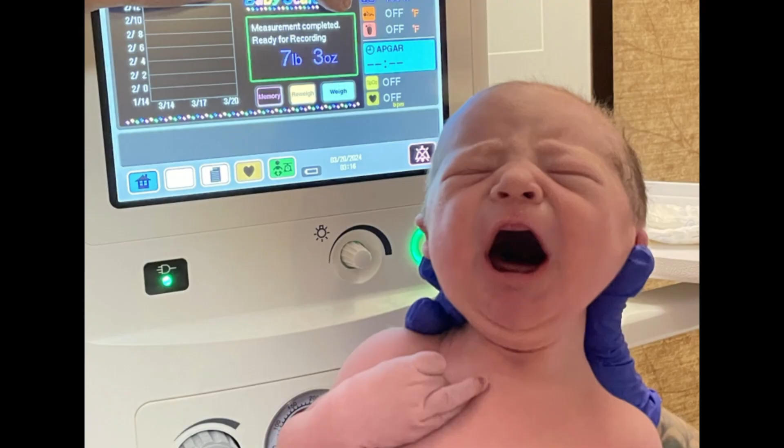In 2024, my wife gave birth to our first son. Shortly before his birth, I was compelled to create a gift for him, a custom homemade gift that could be something he could look back on and know his daddy loves him. That led to the creation of this Stormlight Archive themed Sylphrena nightlight. It was the first 3D print project I did that I played with LED lights, and I've done several since then and have learned quite a bit.

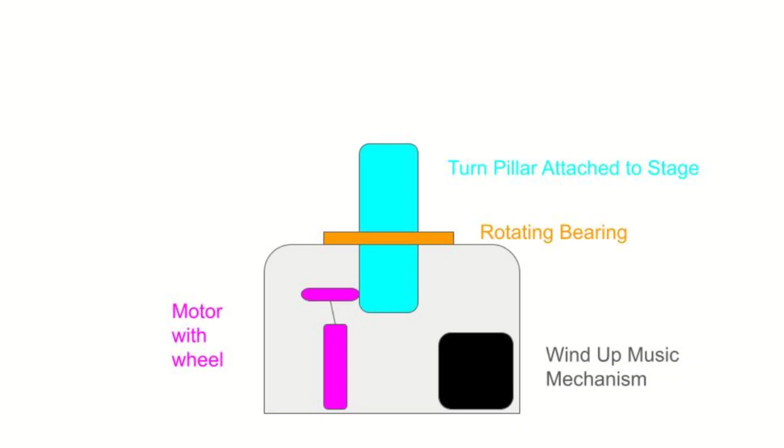Well, last year, my daughter was born, and I wanted to do something similar. So the goal was to make a music box of sorts, though as you'll see, this ended up being nothing like a box. My thought was to have a classic wind-up music box mechanism that, while it plays, will cause a platform or stage to spin, while LED lights will ebb and flow in a dreamlike manner. So let's dive right in.

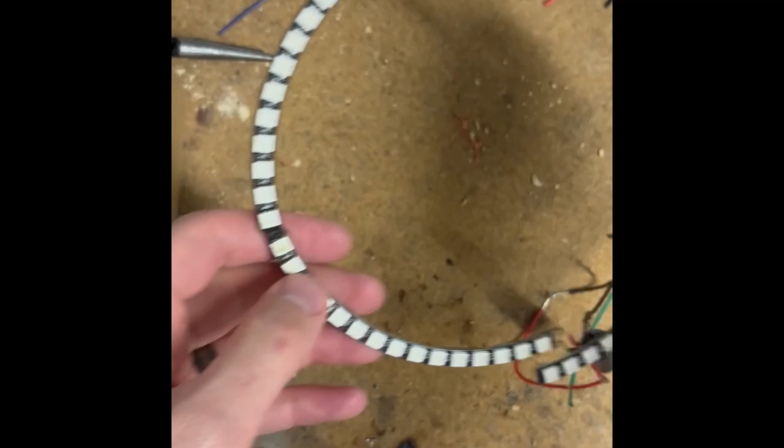Before I went in and started 3D modeling the actual parts, I decided I should figure out the wiring and the electronic components. The easiest way to do this would be to incorporate a simple power button that I could push that would turn on the motor and would turn on the LEDs. However, I really wanted a true wind-up music box mechanism rather than just an audio recording or a speaker that would play when I push the button. I wanted it to feel a little bit more authentic than that.

However, it's also independent of the rest of the system. So I could twist the music box mechanism and music would play, but that would not make the stage spin and it would not trigger the LED lights.

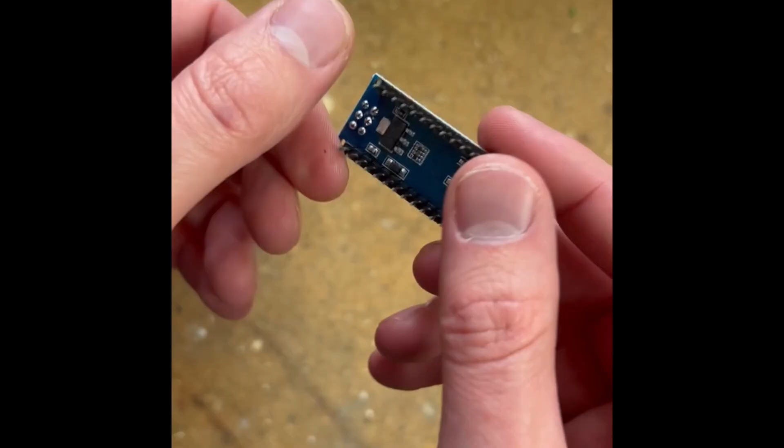And so this is where I got to play around with the idea of what is called a piezo disc. Essentially, a piezo disc detects mechanical vibrations and then can send a signal. So the plan was we glue the piezo disc right next to the music box mechanism so it can detect the vibrations of the music box. That can then send a signal to the Arduino, which can then tell the Nano chip to power both the motor and the LEDs so that everything is in sync. This way, when you wind up and start playing the music, we still get the spinning stage and we get the LEDs ebbing and flowing.

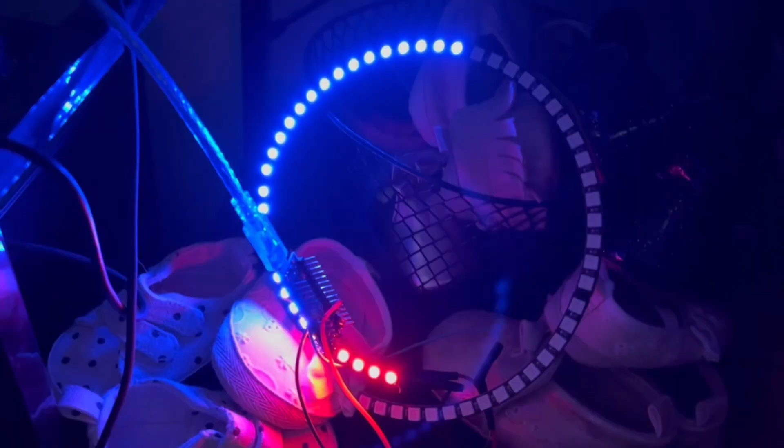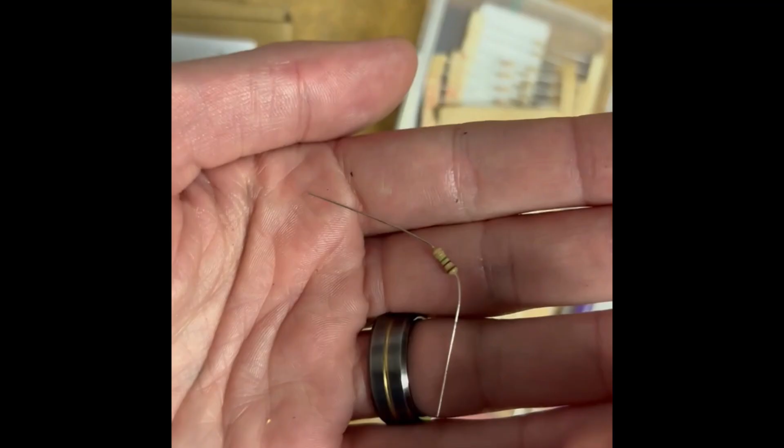Pretty simple, right? Well, there's a few things we had to take into account. One, because the piezo disc can pick up vibrations, it's possible that it could pick up sound outside of the music box. So we had to adjust the sensitivity of it in the code. The other thing that helps with this is putting a 1 million ohm resistor across the two nodes of the Arduino that the piezo disc connects to.

Next, we're talking about powering a motor. Based on the research I did, you don't want to power the motor directly from the Arduino - that's just likely going to cause problems. And so instead, it was recommended I get what they call a MOSFET board. Now, the kind I got already has the resistors and stuff built in, so I didn't have to add any additional resistors to help with the flow of current.

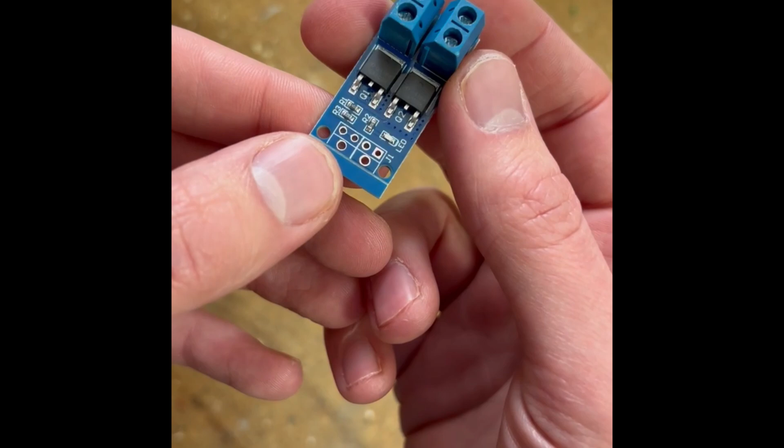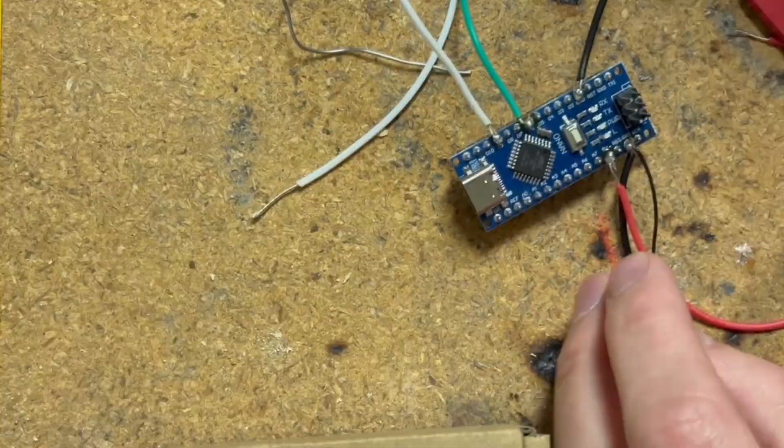But basically, you connect the MOSFET board directly to the Arduino, and then you connect the motor directly to the MOSFET. What's cool about these Arduino Nano boards is that they have a series of pins that you connect your different systems to, and each pin can be independently programmed. So I have one running the lights, one running the motor, and one that the piezo is talking with.

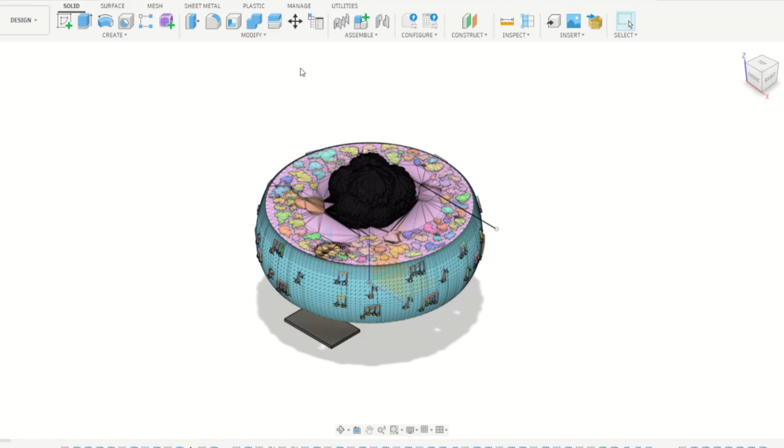All right, then came time for the 3D model. This was an interesting one to model because I had to think very much about the functional purpose of all the different parts. The plan was basically to do this in two pieces - a bottom piece and then a top stage that's going to spin. In order for that to spin, we need a motor that has a wheel attached. As that wheel spins, it's going to push against the top piece and spin the upper stage.

Essentially what I did is I designed the top stage to have a central pillar. This is going to pass through the opening in the bearing that I got.

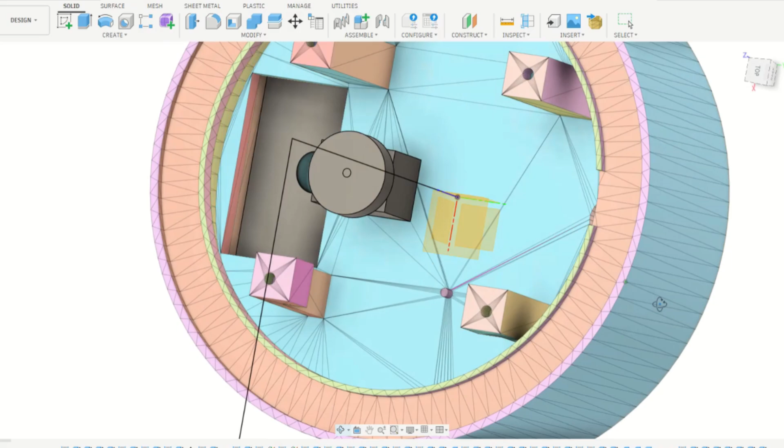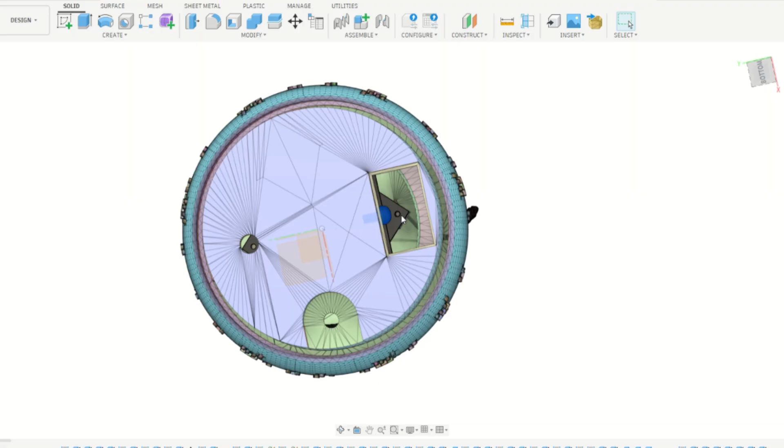The bearing is what's going to connect the top and bottom together so the top stage can spin. Thinking this through, there was a concern: once I put the bearing on the bottom part, the floor would block my view to the top part, so I wouldn't be able to attach it there. So I had to design a window in the floor so I could still reach in and screw things into place.

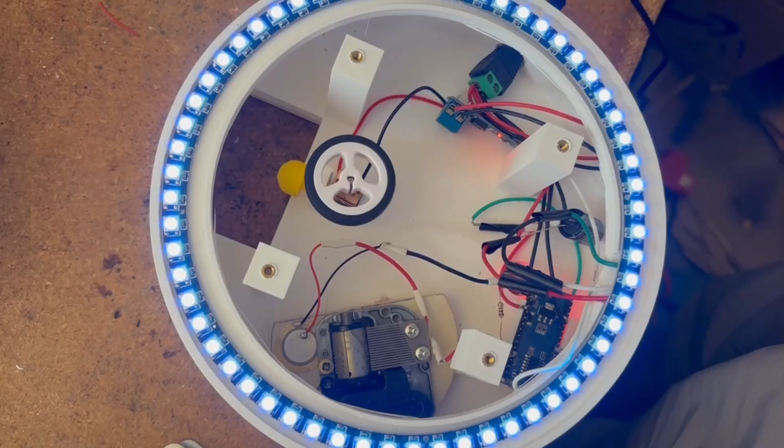This is an important piece. I designed the motor stand to have a little slot for a plastic bolt that I also 3D printed. That was so we could fine tune how much the motor wheel pushes against the central pillar that turns the upper stage.

For my dogs, I was able to take some pictures into Maker Lab through Bambu Studio, which has a 2D to 3D function. I used that, and it took a few attempts, but I was able to get some good 3D models of my dogs. I decided to print all three of these pieces with my resin printer to get a bit higher quality detail.

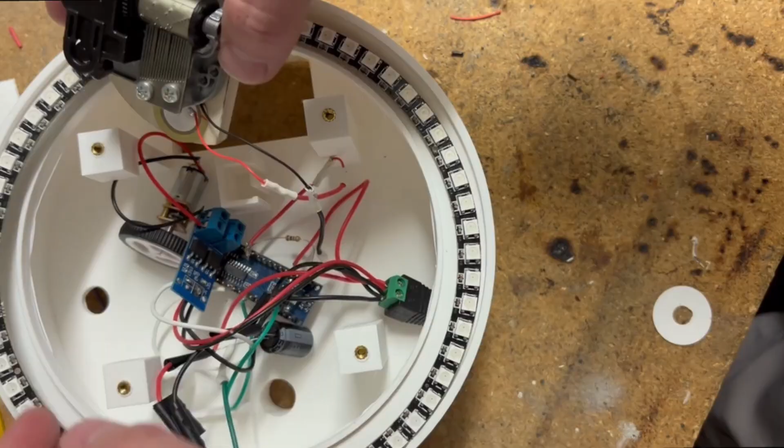Once everything was printed, it was time to assemble, and this was a little tricky. At first I thought, do I just screw the bearing directly into the plastic? That doesn't seem very reliable—what if I crack the plastic? Well, guess what, someone smarter than me has thought of this before and created what are called Ruthex brass inserts for plastic.

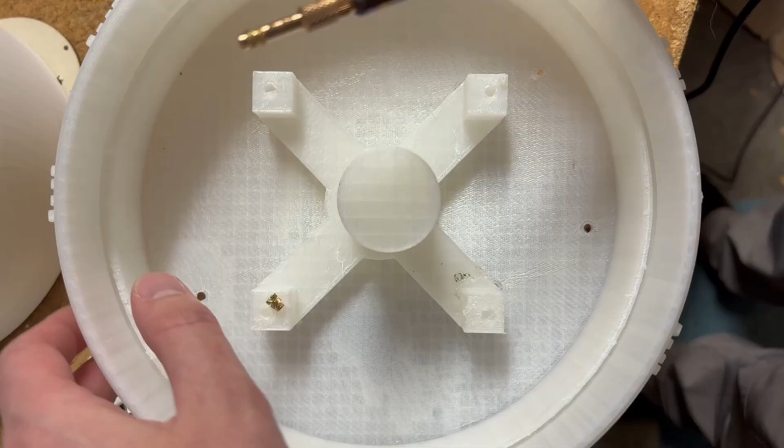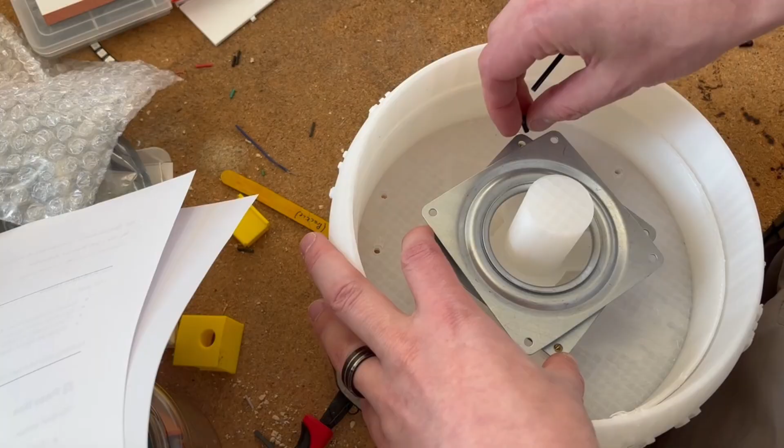This is a pretty cool idea. Basically, they're little metal inserts that are threaded on the inside. The whole idea is you use a soldering iron to heat up these inserts, then press them directly where you want them to go, and they adhere into the plastic as if part of it. It makes for a really strong connection, but now I have a metal thread I can screw metal bolts into, and if something's wrong and I need to take it apart, I can. And guess what, things went wrong, so it was a really good thing I did this.

Final step was really painting. My wife helped with this a little bit—I painted our dog, she painted our daughter, and that's about it.

What do you think? More? What do you think, Vienna?

This was a tricky project, but it was also pretty fun to learn how to work with piezos and play around with motors. I think it's going to open the doors for some fun projects in the future. As I always say, expect the mistakes on projects like this. Expect for things to go wrong, but learn from it. The more mistakes you make, the more you're going to learn, and the better your projects are going to be in the future.